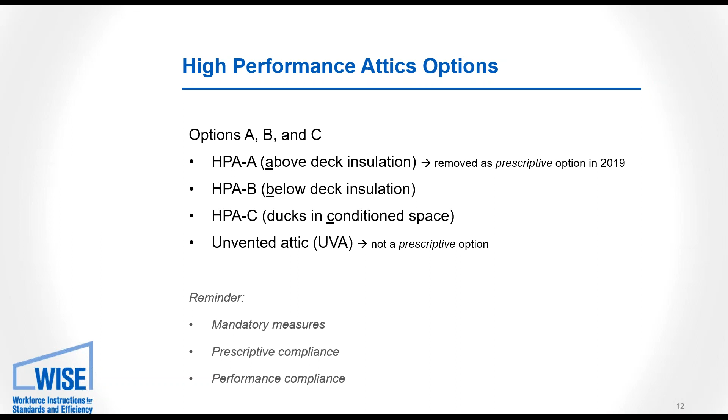Then there's prescriptive compliance, and that's what we're going to look at today for the most part. But as soon as you deviate from that prescriptive option, you're basically going to the performance path, which allows a little bit of flexibility. But when you deviate from those prescriptive options, you're typically penalized if you're doing something that's less stringent.

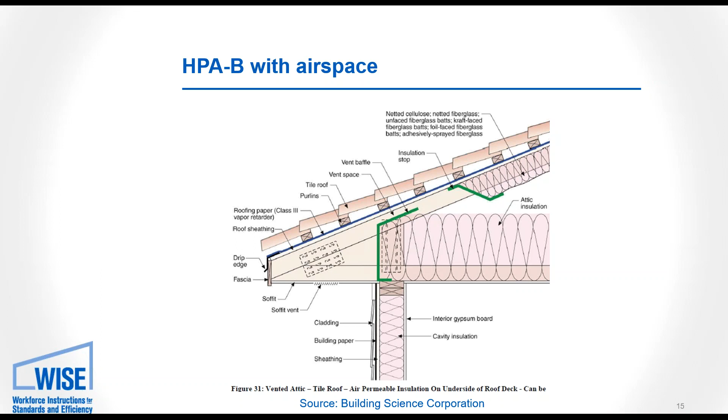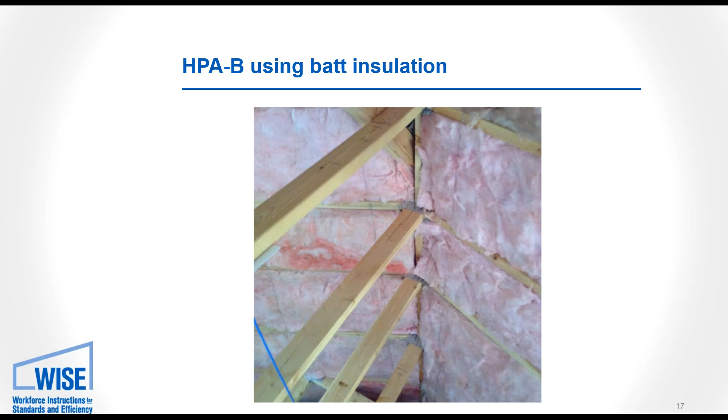Here's a photo of some batt insulation looking up underneath the roof deck.

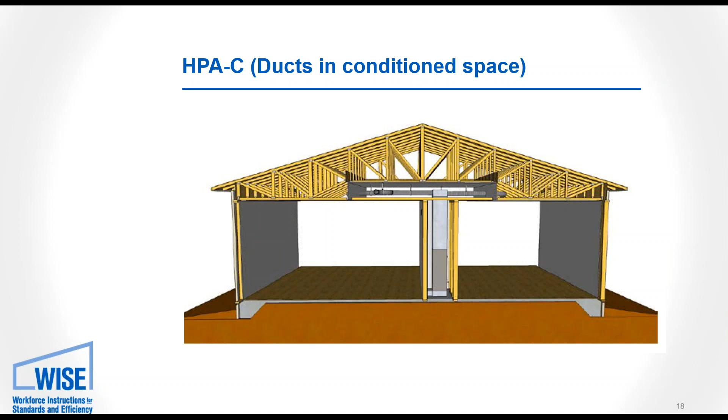Ducts in an unvented or sealed attic do not count as ducts in conditioned space. Instead, that's its own category, which we'll discuss on our next slide, an unvented attic. So this is if you're going to follow a performance approach. This is not a prescriptive option in the code. And it essentially moves the thermal boundary from the ceiling to the roof deck.

You're probably looking at about R38 below the roof deck. Again, this is not the same as ducts in conditioned space, but performance modeling can show similar results depending on the R value and other aspects of the home design.

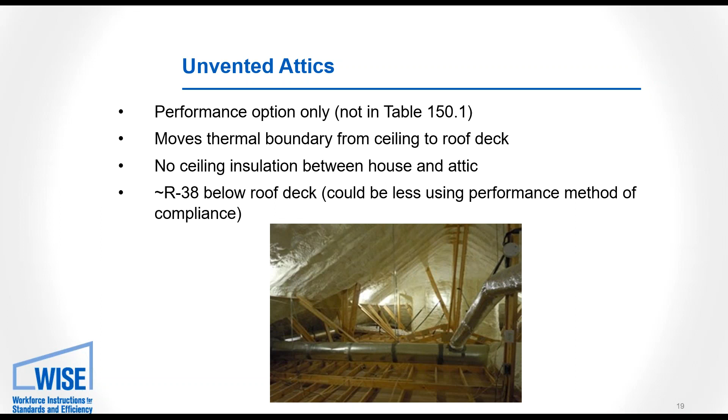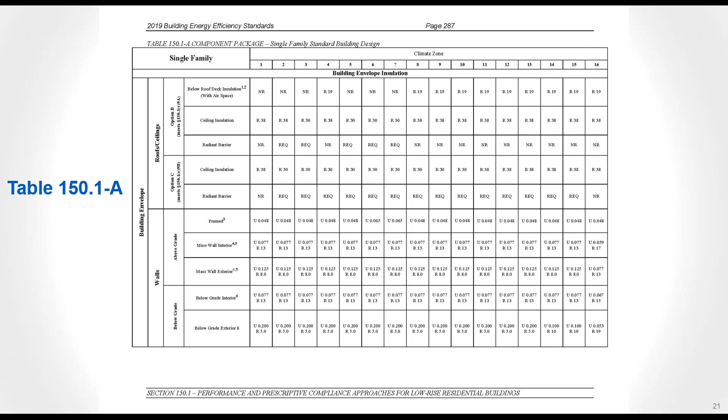Okay, let's take a look at the different climate zone requirements. Here is table 150.1-A from the main Title 24 code. You probably can't read that, so let's zoom in a little bit.

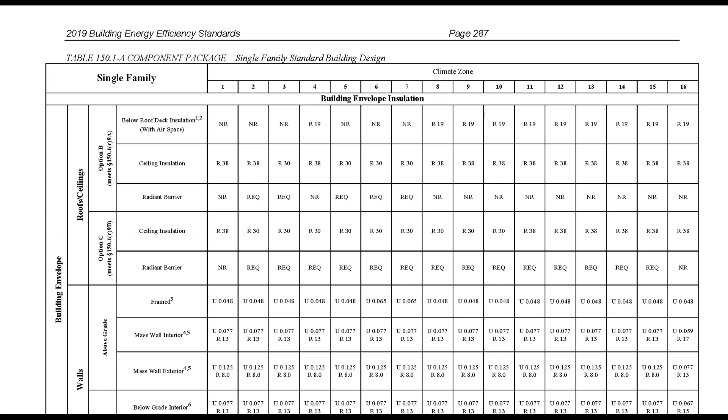This table actually covers a few pages, and this first one is just on the roof, ceilings, and walls. I'll zoom in a little bit closer yet, and you'll see way up at the top here, we're looking at single-family homes, which is primarily what we're addressing today.

Over on the left-hand side, we have roofs and ceilings, and option B and option C. You saw my note earlier that option A has been removed. That's the above deck insulation as a prescriptive option.

So we see the different climate zones up across the top. I'm only showing climate zones 1 through 9 right now. You'll see the below deck insulation, whether it's required or not for that climate zone if you're going with option B, the ceiling insulation, and a radiant barrier.

You'll notice that there's an NR, not required, for climate zones 1 through 3 and 5 through 7. You do put on a radiant barrier in those situations typically, but it's worth noting that without that insulation below the roof deck, it's not really a high performance attic. It's not required for that climate zone per this prescriptive option.

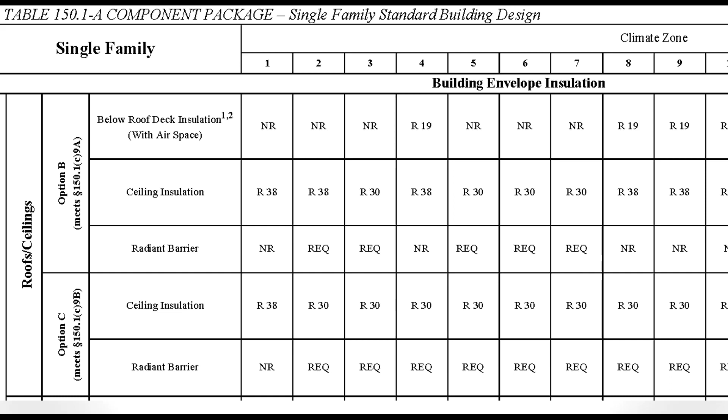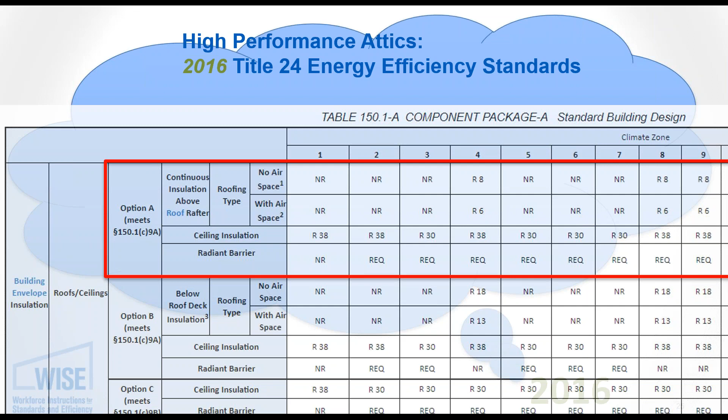The 2016 table looked very similar, but you'll see that there is that option A. I mentioned that has been removed primarily because no one was doing it. Option B or C or something else has been much more popular. It's not to say you can't do option A, it's just not a prescriptive option in the code. You would be doing it in your performance method.

Also note that there is table 150.1-B, and that is for multifamily, low-rise multifamily. So if you're working on multifamily properties, make sure you're looking at the multifamily table.

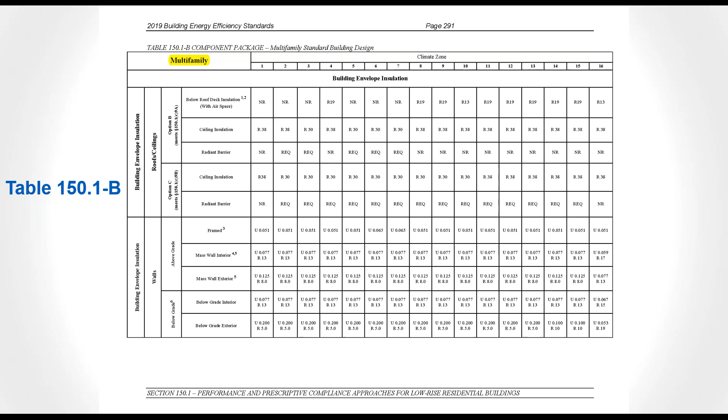What qualifies as a high-performance wall? Okay, in the code, the 2019 code, it gives a few examples. What we're looking for is what is the overall U factor of the wall assembly.

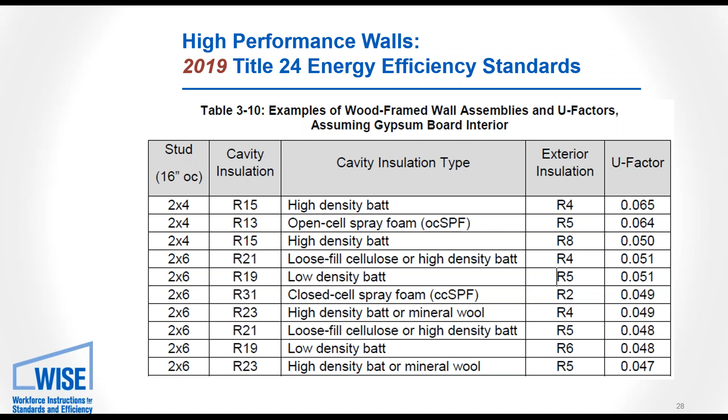You'll see we have some examples with 2x6 walls, various types of insulation, and what those things add up to. And this example table is all 16 inches on center.

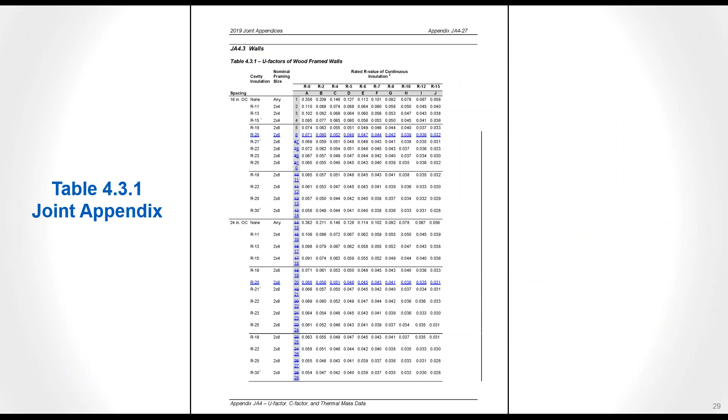Now there's another document, the joint appendices, there's several of them, and the fourth one has table 4.3.1, and this is kind of a little cheat sheet. And if we zoom in here, what we'll see is lots of different options where the math has been done for you as to what that U value is. And what I've highlighted here, this is probably a lot to absorb, so let's walk through this a little bit.

Up at top, you'll see that we have spacing 16 inches on center and several examples. Down towards the bottom, we have 24 inches on center. The first column is what the cavity insulation is between your studs. Your frame sizing, 2x4, 2x6, we even have some 2x8 examples. And then the columns on the far right are the rated R value of continuous insulation. So that would be your rigid foam insulation that you're probably putting on the outside of the wall, but there's numerous different assemblies that would work.

At any rate, I've highlighted two different numbers. So if we had a 2x6, 16 inches on center with R19, that's the green box there up at top, and used R4 for the continuous insulation on the outside, that would give me an assembly U value of 0.055.

What I'm highlighting here is if you were to go from 16 inches on center to 24 inches on center, that eliminates some of those thermal bridges that the studs cause. By moving those studs out, going from 16 to 24 inches, you can actually get a bump, probably about a 0.002 difference in U value by going to 24 inches on center.

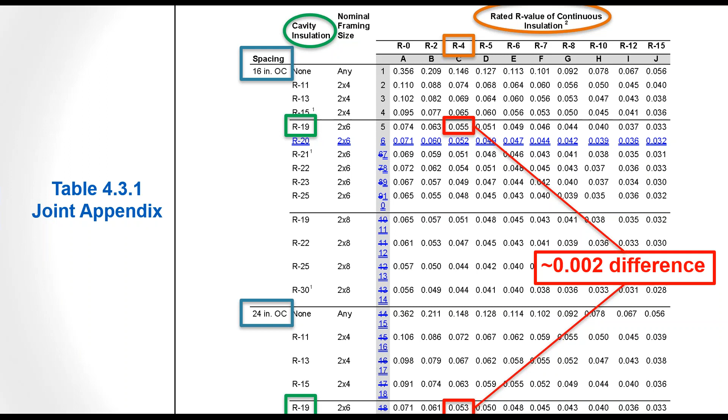That might be worthwhile for builders to consider because in many cases, the 2x4 walls that we've been building with in California for decades now very frequently are not going to cut it. We're probably looking at 2x6 walls starting January 1st when the 2019 code goes into effect. So if builders are spending a little more money for the 2x6 studs, maybe it's worth considering spacing them out.

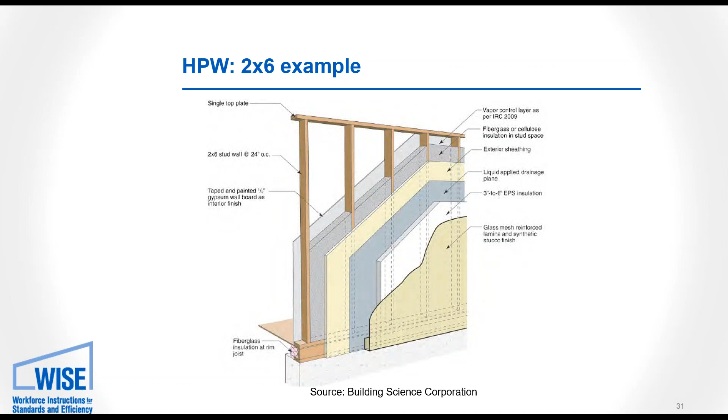Here's an example of a 2x6 wall. I know the details are hard to see, but I think what you might be able to pick out is there's multiple layers to this wall, and the point is we're looking at the full assembly. Here's a 2x4 example. So from the gypsum board, the stud, all the different insulation and vapor barriers, those all go into the assembly U factor.

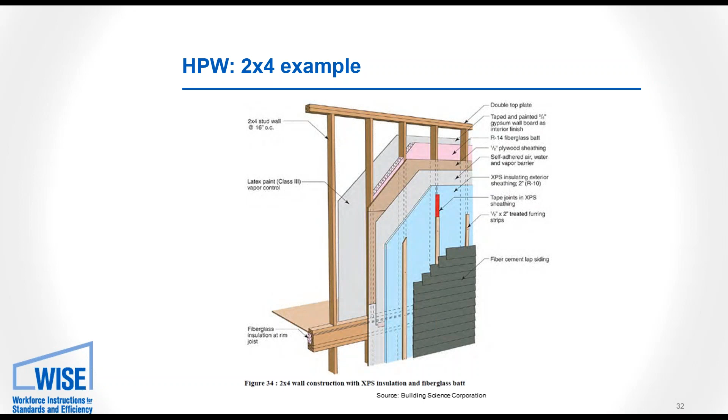There are also options to do away with your stick frame construction completely and look at structurally insulated panels or insulated concrete forms. There's probably a few other options out there for building your homes, but these provide very good U values as well.

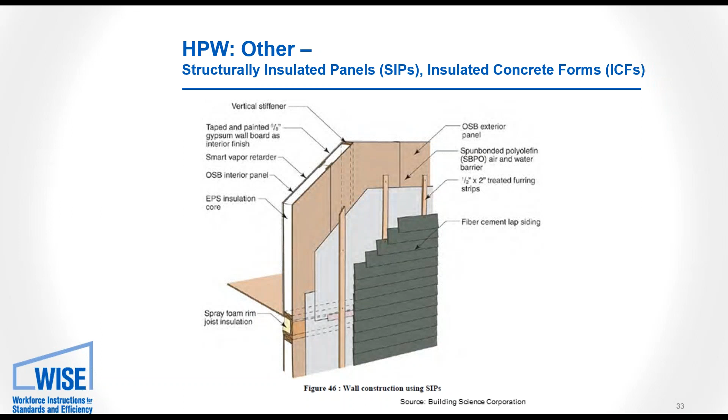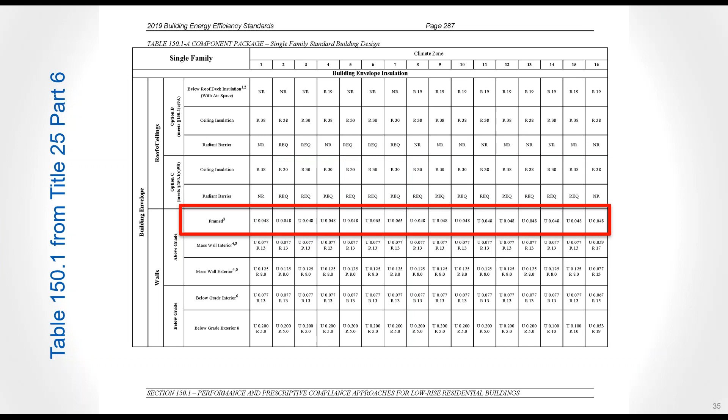Just like we did for attics, let's look at the climate zone requirements for walls. Here's that same table. We're just going to focus a little lower down on the table, at one line in particular. And there it is. Let's actually zoom in a little bit more.

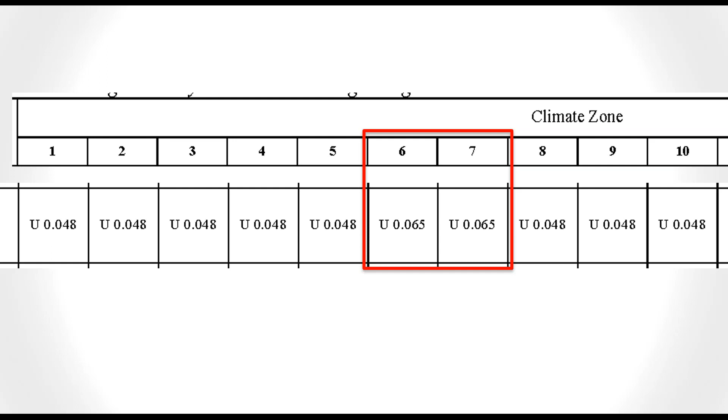So for a high performance wall, it's defined by what its U value is. You'll see that in the 2019 code, for almost all climate zones, it's a U factor of 0.048. The two exceptions being climate zone 6 and climate zone 7. I'm down in climate zone 7 right now, where it's 0.065.

So to compare from 2016 to 2019, back in 2016 the table looked exactly the same, just with a different U value. It was 0.051. It's become more stringent in 2019, going down to 0.048. That's what we just saw on the table. And climate zones 6 and 7, those two exceptions, actually didn't change at all—they remain at 0.065.

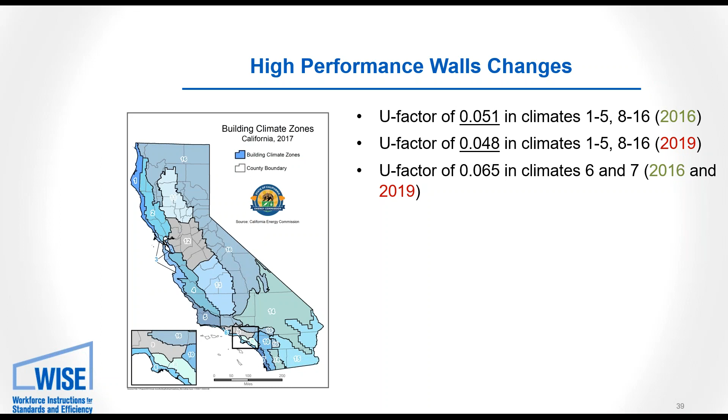That's the bulk of the big takeaways as to what things are, but there are some other changes we want to talk about that relate to walls. One is that starting January 1st, we're moving away from TDV as the main metric to EDR. TDV is time dependent valuation, and EDR is the energy design rating. I have a next slide where we'll go into a little more detail there.

QII, quality insulation installation, is a prescriptive requirement in the base model. It's not mandatory, but if you're an energy consultant or working in the modeling software, you'll see that if you deselect QII, you'll be penalized heavily. So for most people, QII is more or less required going forward.

We also know that solar is required on every home. Up through the 2016 code, we saw that these high performance walls and attics were maybe a little less stringent, but they were there in the code as a prescriptive option. But what a lot of builders would do is work around that by just slapping photovoltaics on the roof.

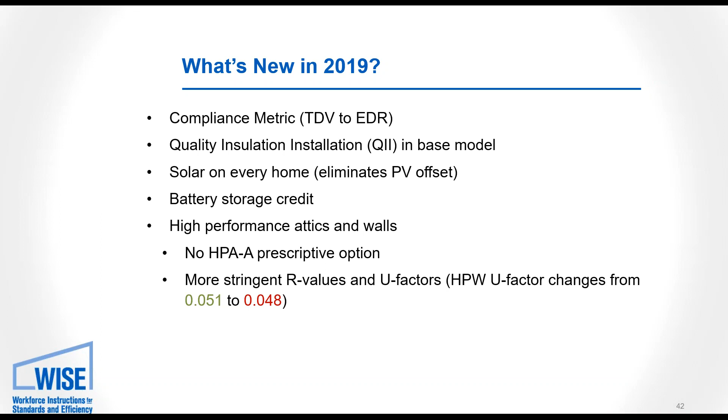But that is no longer really allowed as we move to an EDR rating and look at it from a few different perspectives. There's also a battery storage credit that can come into play, and then the high performance walls and attics we just talked about. Again, the above deck option is no longer available, and we have more stringent R and U values for both the attic and the walls.

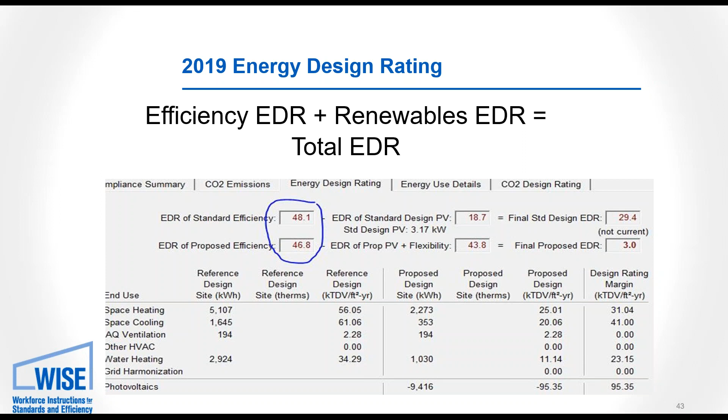This is a screenshot from some modeling software to emphasize that in 2019 we'll really be focusing on the energy design rating, and we look at it in two different ways. We really want to differentiate between energy efficiency measures and renewable energy measures, which is typically photovoltaics. So you have two different scores: your efficiency EDR, plus your renewable EDR, equals your total EDR. You want to meet the required values for each of those as the base model would set them.

I think by now we all know that photovoltaics are required, so slapping those on to get away from good envelope design is no longer an option.

There's also a community solar option, so instead of putting solar panels on each and every house, if in a close by location, you could do a community solar farm. I don't believe I've seen any yet, but it is an option.

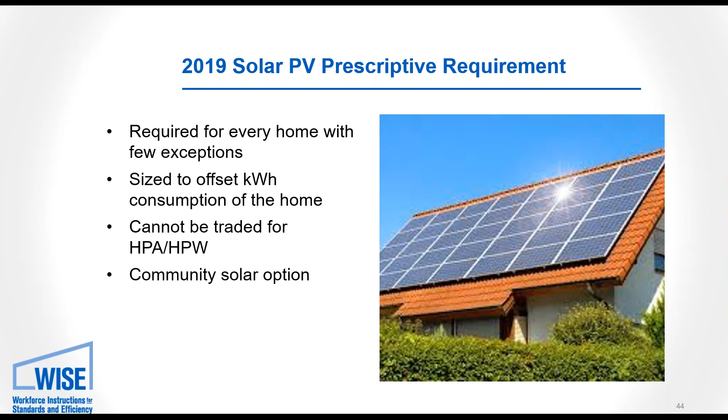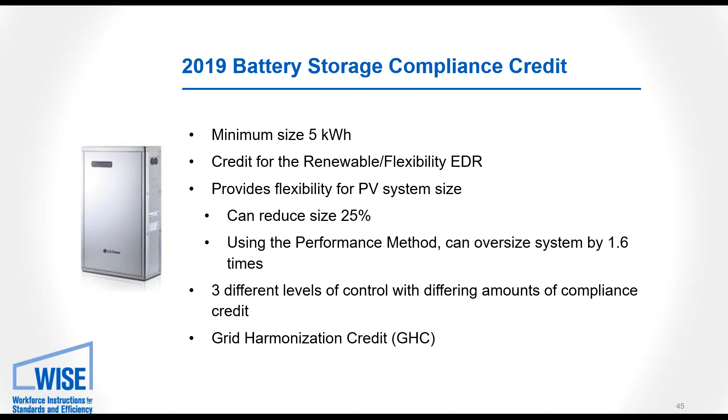And then batteries also. This is something that gives you some credit in the model by reducing your PV size. There is an efficiency EDR performance credit with batteries that can be traded off against high performance attics or walls or other efficiency measures. Its maximum value is tied to the difference between the 2016 and 2019 high performance attic and wall measures for that climate zone.

And if you ever want to have fun, if you want to stump the expert, ask them how a radiant barrier works. I've observed a lot of people don't understand how that radiant barrier works. It's a shiny material and it certainly reflects light, but down there in the attic, we don't have the sun shining. What we're doing is preventing the thermal radiation from transferring from that roof deck down into the attic. But it requires an airspace. So by putting batt insulation right underneath it, it totally eliminates any value there. So if you're doing below deck insulation, no radiant barrier is required under that roof deck.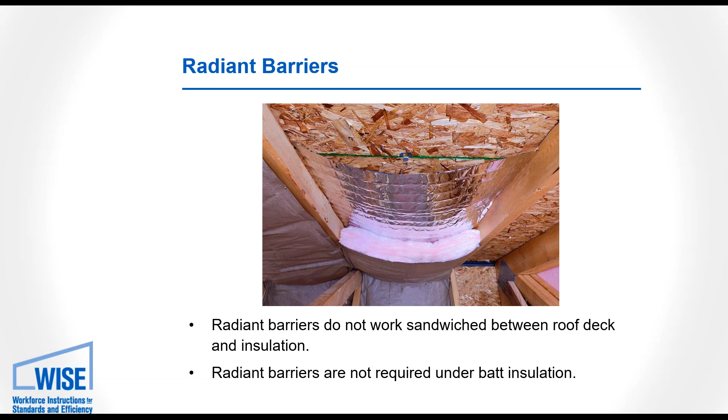Gable ends. In this picture here, we see that the gable end has been insulated just as the roof deck has been insulated, but typically that batt insulation on the gable end is not required. However, a radiant barrier is required.

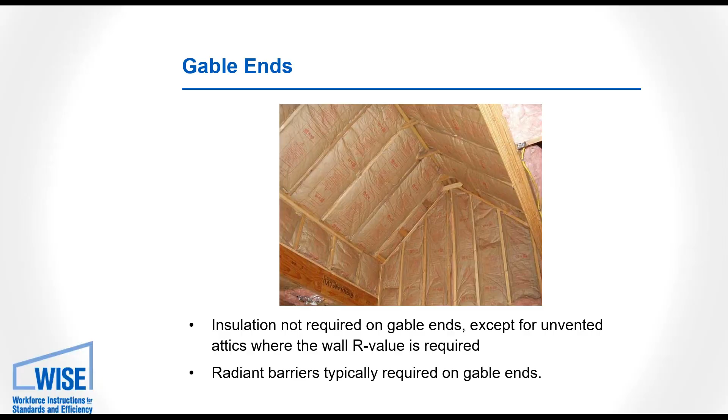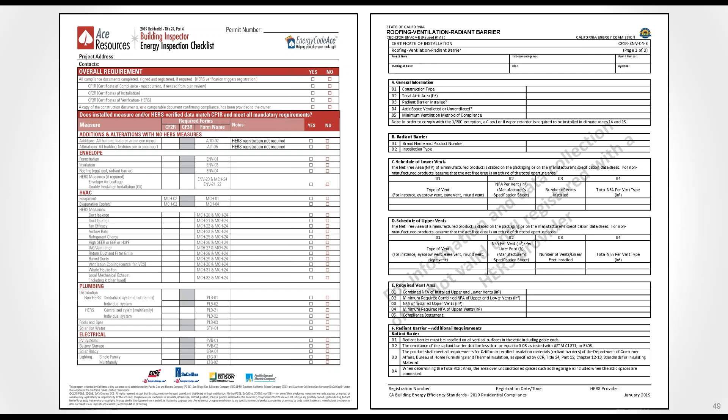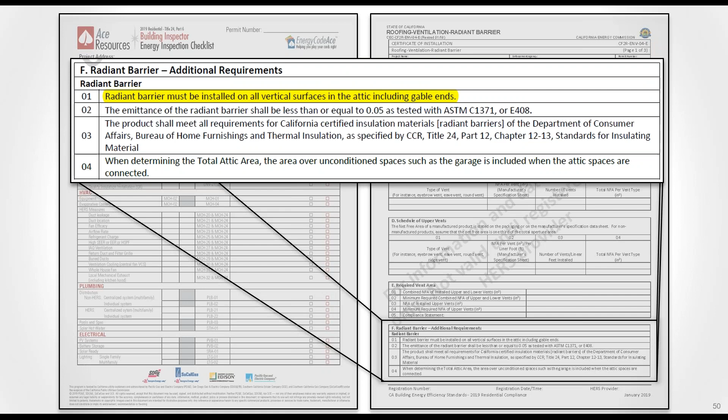Here I have on the left-hand side a building inspector energy inspection checklist from Energy Code Ace. And it mentions for the insulation to look at form ENV04, which is over to the right, which I downloaded from the CEC's website. And you can see right there, radiant barrier must be installed on all vertical surfaces in the attic, including gable ends. We had a lot of confusion on some projects through utility programs on exactly that question, so I'm pointing that out right here.

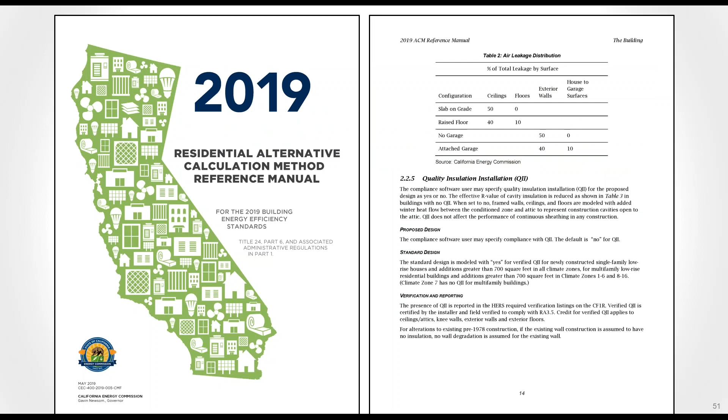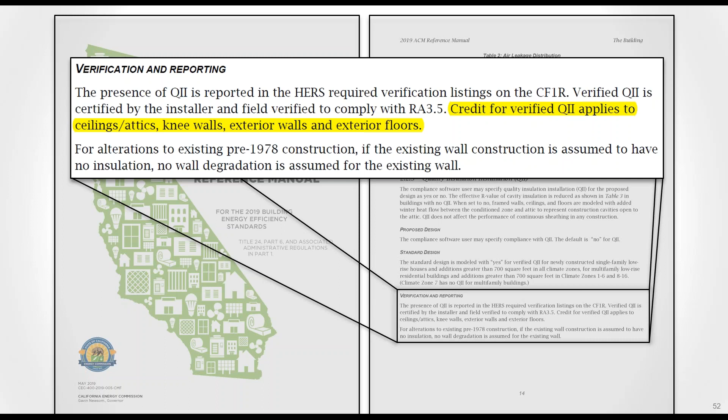Here in the Residential Alternative Calculation Method Reference Manual, on page 14, we talk about quality insulation installation. The question that's come up is, does QII apply to the attics? And here we go: credit for verified QII applies to ceilings and attics. So yes, with QII, the rules apply not just to your walls, but up there in the attic as well. Throughout these various Title 24 documents, you'll find little tidbits of information on QII, on other wall and attic requirements throughout. So one point I want to make is that information is sprinkled throughout the various documents.

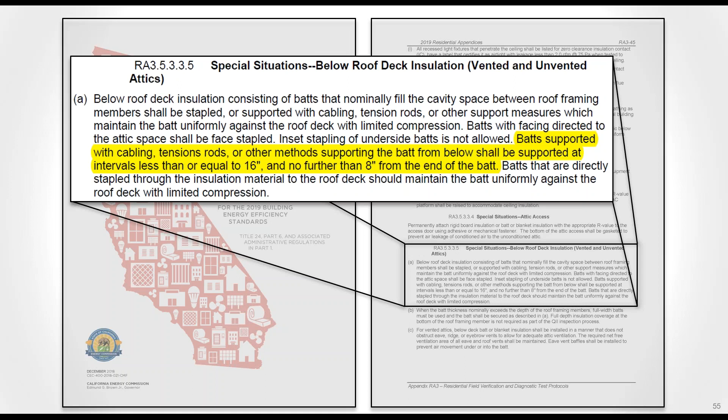Here we look at the reference appendices, and there's a whole section on quality insulation installation procedures. I thought that's something, if you're not familiar with QII, go directly to the source and see what it's all about right here. One section I've highlighted: batts supported with cabling, tension rods, or other methods supporting the batt from below shall be supported at intervals less than or equal to 16 inches. So QII not only applies to the whole building, but there are also some specific QII instructions as it pertains to putting insulation underneath a roof deck, since it's not a vertical surface here. So QII gives some of that guidance.

Some common challenges. Several of the major utilities in California ran a master builder program to help get over the learning curve, so we have some results from that. Some of the adoption barriers would be lot size—if we're going to 2x6 walls from 2x4, you have to accommodate for those few inches. The framing differences, if you're going from 16 to 24 inches. Cost is obviously a big barrier. Learning curve and materials, decision-making process.

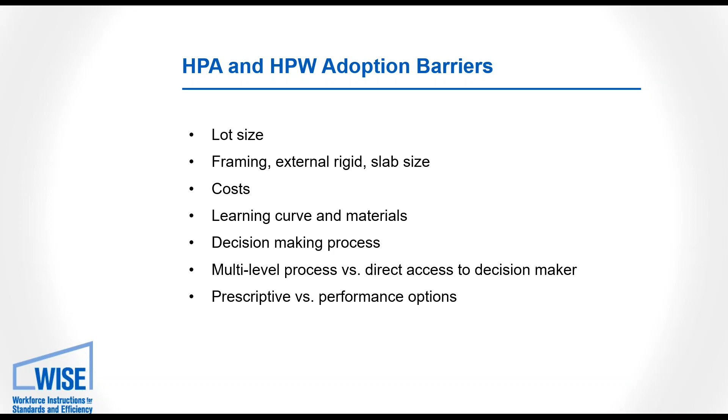I think in many ways, 10 years ago, maybe the energy model for a project was done at the very end—the building was all designed and you put it into an energy model and got your results. Now that we're looking at not being able to fix any deficiencies by throwing on photovoltaics or just increasing the efficiency of your HVAC or domestic hot water, but really looking at that envelope as a critical piece of the design, that's something that would be hard to undo at the very end if your model doesn't work out. So getting the decision makers in with the energy modeler and other stakeholders early on in the process is always better.

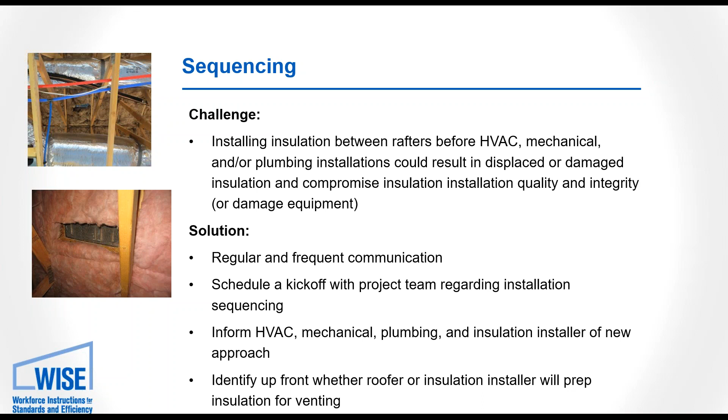You also have your ducting and maybe some plumbing equipment or pipes up in the attic, and where in the past we would just blow in loose insulation at the very end, now you have to consider when to put in the below deck insulation. I don't think there's any magic bullet to answer that question other than communication between the trades. So during your takeoff or kickoff meetings, make sure that gets mentioned.

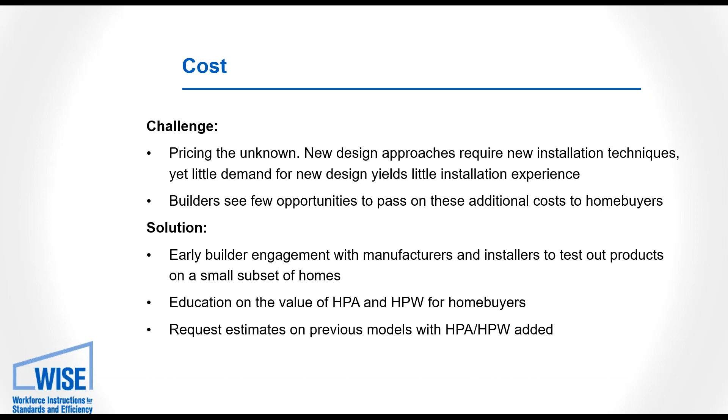For those that haven't, give us a call - we'll help you out.

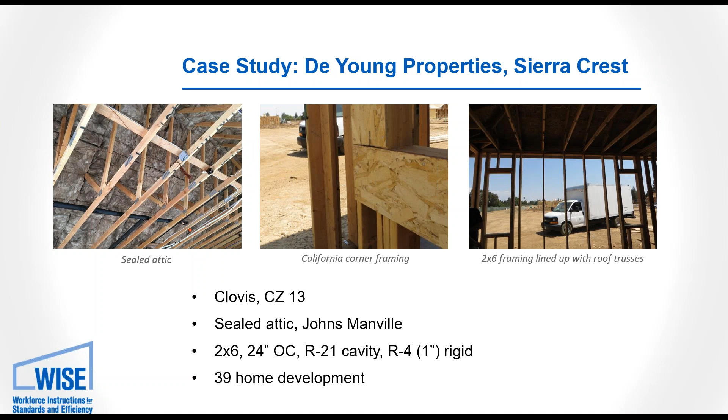A few case studies from the master builder programs I mentioned. Here's De Young Properties in the Central Valley. You can see they went with the sealed attic, some advanced framing techniques, the California corner framing that allows insulation to get right up to the corner without any air gaps. And they also used 2x6 framing.

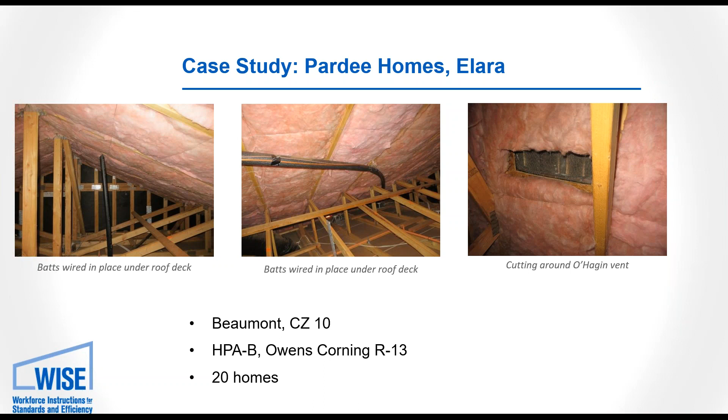If you can make out, there are those cords that hold up the batt insulation. So what most builders are doing is just purchasing the regular batt insulation you'd have in walls, but almost all the major manufacturers have products - and have had them for a few years now - specifically designed for below roof deck insulation. Something to look into.

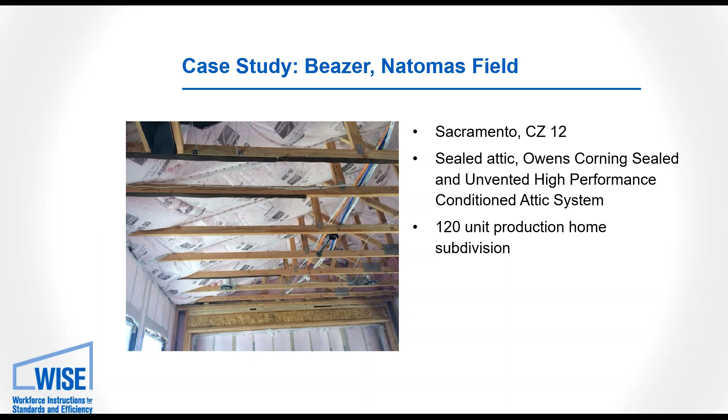wisewarehouse.org - that's the program's official website, and as the name Wise Warehouse suggests, it is a warehouse of additional resources. We'll get this presentation posted up there in the next few weeks. There is a lot of manufacturer information on products specifically designed for meeting the code requirements, how-to guides, and also additional links to other third-party resources such as CAD drawings.